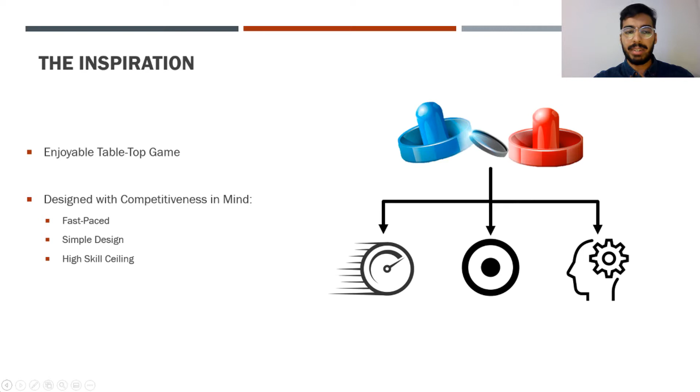Throughout university, we all enjoyed the tabletop game of air hockey as an opportunity to spend time with friends while maintaining healthy rivalries. The game is able to help maintain a competitive nature because it involves critical reaction times, simple mechanics and rules, and high skill ceilings due to the fundamental skills required to play.

As fans of air hockey, we saw an opportunity to improve the overall experience of the game through the implementation of higher quality features. Specifically, we had the desire to make the system autonomous and increase outreach through making the game more accessible, all while maintaining the traditional gameplay of standard air hockey.

The need for the desire could be highlighted by the growth of the game of air hockey within the market according to Technavio. The additional autonomous nature of the game provided a good opportunity for challenging solo play, such as in the presence of a pandemic. With added accessibility features, the game would also be able to extend outreach to a larger audience incapable of playing through traditional means.

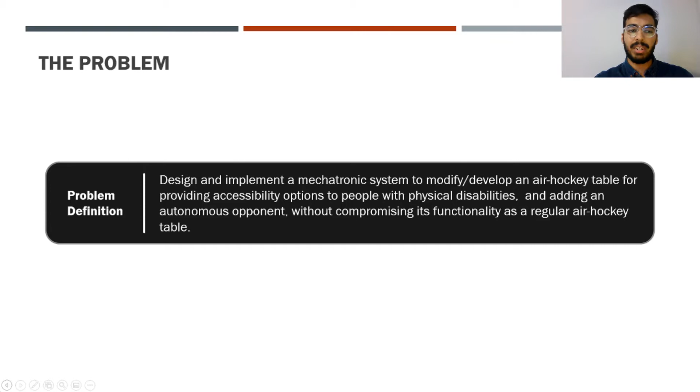Using the information compiled, the problem can then be defined as to design and implement a mechatronic system to modify or develop an air hockey table for providing accessibility options to people with physical disabilities, and adding an autonomous opponent without compromising its functionality as a regular air hockey table.

Using this definition, research found similar problems tackled by K. Igeta and A. Namiki, using high-speed cameras to predict required behavior of a robot-based opponent, while C. Marra et al. developed an autonomous table. The latter highlighted issues with the implementation of a camera-based system, which included a high-glare surface, high-resolution camera requirements for accuracy, and the time cost of cameras. The implementations prevented the tables from being used traditionally and did not implement accessibility features.

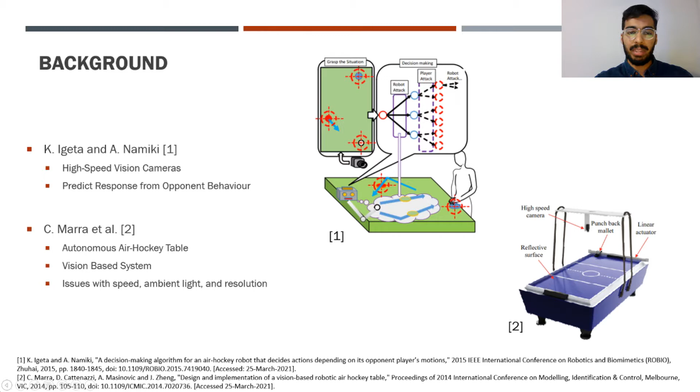Overall, it was determined that the project objectives required the solution to be user-friendly, such that the users could easily switch between autonomous, accessible, and manual play, while the overall design should be safe and robust. Functioning to block any shot according to the level of difficulty, the table presents a feasible technical challenge designed for commercialized entertainment. To best explain our final design, let's start off with a shot.

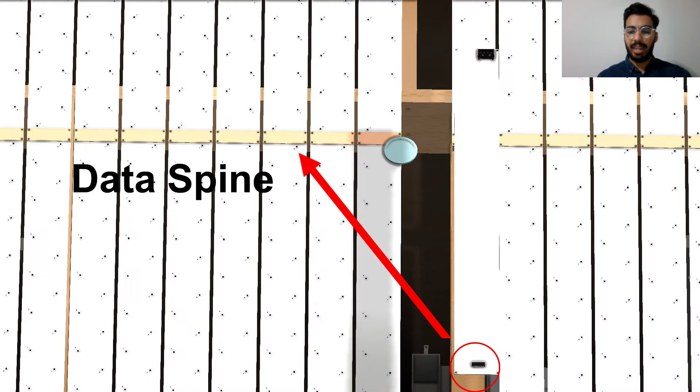As the puck leaves the point of impact, it takes on a very linear trajectory. As it passes over the table, it activates corresponding Hall effect sensors on a series of sensor-slat PCBs. These sensors are polled for their state every 1 millisecond, allowing us to read our puck position over 100 times on every shot. Each sensor half row is represented by a byte, and with 2 of these half rows in each PCB, a total of 2 bytes are sent by individual CAN bus chips through our data spine into our STM board, where all of the processing occurs.

The STM board is the heart of the system, with separate boards connected via CAN bus for managing accessibility and power. The STM board has been previously calibrated with knowledge of the position of each sensor. When the sensor triggers, the board knows the set of ranges of where a triggering puck could be at every polling interval of 1 millisecond. Using a Kalman filter combined with linear regression, this history of sensor activations is used to generate a velocity vector for the puck in real time.

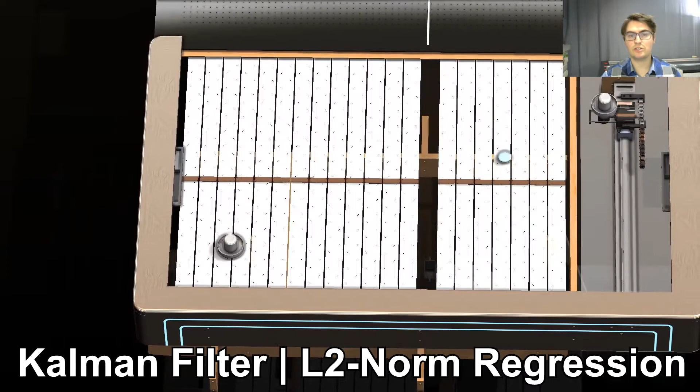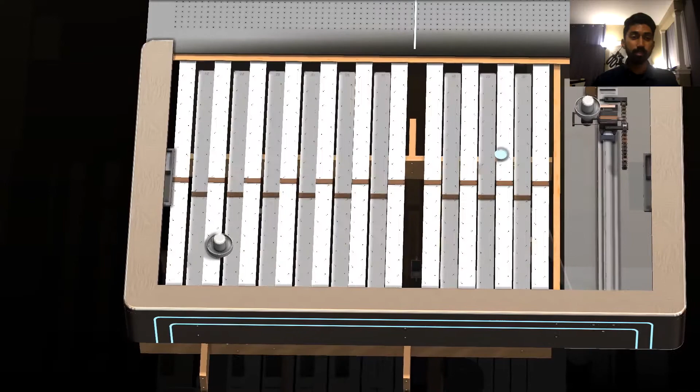With this, the system can predict where and when the puck will intercept our manipulator range of motion. It can even extrapolate shots that bounce off the wall. This is all a modular design, as the board is only concerned with activations for a series of calibrated coordinates, and the slats are all connected via one bus. The table can have individual sensor slats fail, be rearranged, or ship with different quantities depending on the desired trade-off between accuracy and cost.

In autonomous mode, the microcontroller would simply use the computed values to decide where to intercept the puck with the linear guide, and at what time the second degree of freedom should activate to send back a competitive hit. As we are in blended accessibility mode, we have a user that is using their accessibility input method of choice to set a desired velocity to the paddle.

This is accomplished through our accessibility interface, supplying 3.3 volts over a standard 3.5mm jack to read analog values from a variety of adaptive equipment. Supporting many input permutations to help balance user fatigue, our user's input position is scaled to a velocity value.

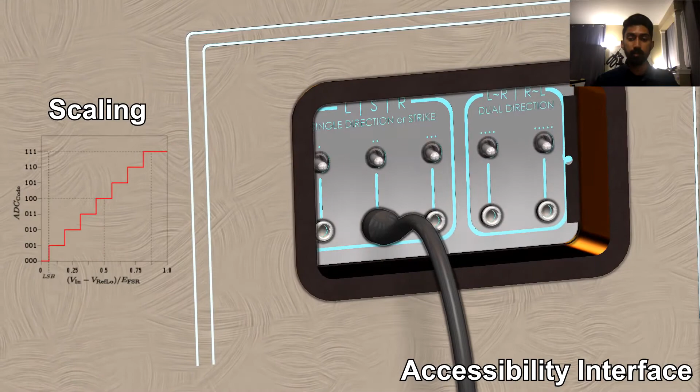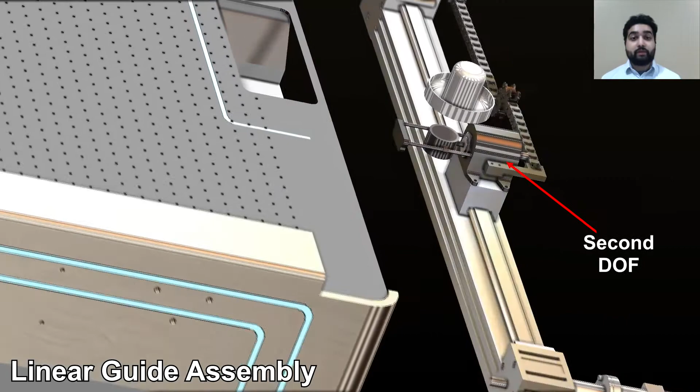These desired values are written to a Trinamic stepper motor, turning the belt on our linear guide, moving our carriage in the desired direction. Mounted on the carriage is our second degree of freedom, a capacitor-powered solenoid that moves a magnetic stack with a punching motion for offense. The paddle above, with magnetic inserts, follows the movement of this magnetic stack, and therefore the carriage. A plate mounted below the linear guide, itself below table surface, completely seals moving components, aiding user safety.

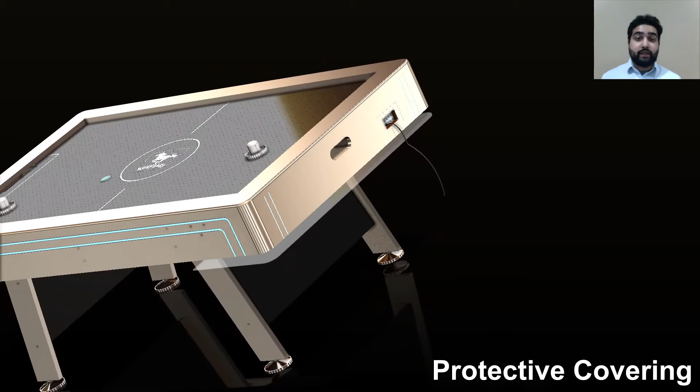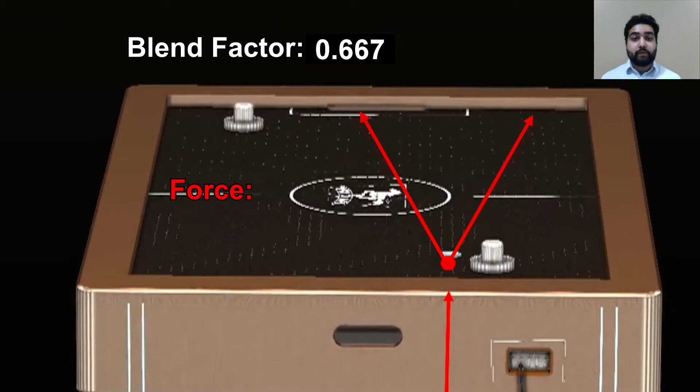Left unassisted, however, the use of a novel input method and the precise positioning requirements of the air hockey table would mean that most gameplay would result in misses. Our blended assist takes our computed intercept value and creates a conic well potential around it for possible manipulator velocity. This makes our final paddle position from player input to be very likely around the point of interception. In other words, our player is much more likely to make a successful response.

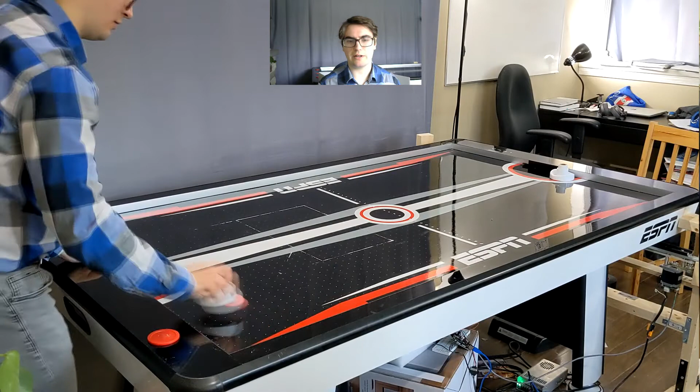Starting in autonomous mode, shots traveling over the outlined white rectangle on the table are tracked using the Kalman filter and linear regression algorithm and pinpointed with the linear guide to defensively return shots with a magnetically controlled paddle. If the user desires to play with a friend requiring accessibility control features, a simple mode switch command can be sent to change the table to accessibility control mode.

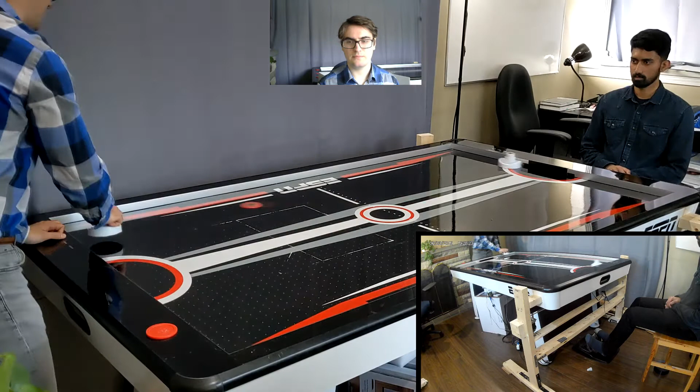Finally, with another simple Bluetooth command to switch modes, the table can quickly be adjusted to manual mode. With a quick swap of the puck and paddle, the table functions as a typical table. For the use of the mechanisms employed in the final design, the table does not require any overhead changes to maintain the aesthetic of a traditional table, with added functionality.

Overall experience with the table highlights its ability to provide multiple options for entertainment. As an added demonstration, we included a video of autonomous gameplay to show the haste with which the system responds.

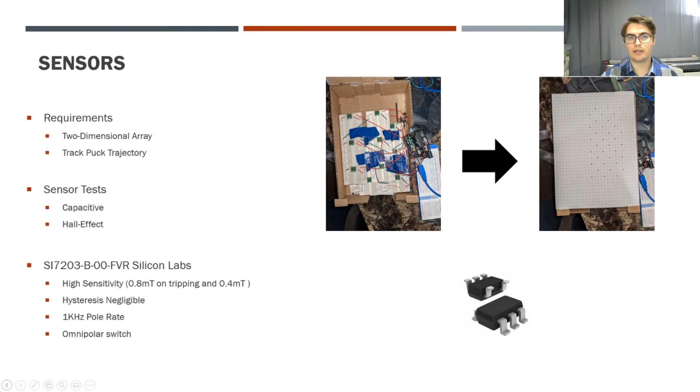With the discrete Hall effect sensors selected, the system started as a single board using an isometric grid pattern to maximize data along the X and Y axes. However, due to cost and mounting complications, a modular approach was opted for. First taking the form of 8 sensors per slat connected to a single CAN bus spine with the MCP25020s, the design was modified to double the amount of sensors per slat to form a linear spine by rotating the boards, each communicating 2 bytes of positional information.

To validate the modular sensor slat system, prototype boards were created using an offset isometric grid pattern with 16 sensors. However, the CAN GPIO extender selected was replaced with a 16-channel I2C extender due to the ease of use and lack of one-time programming.

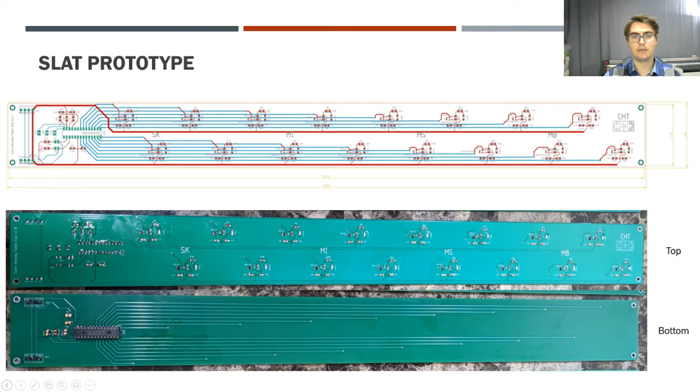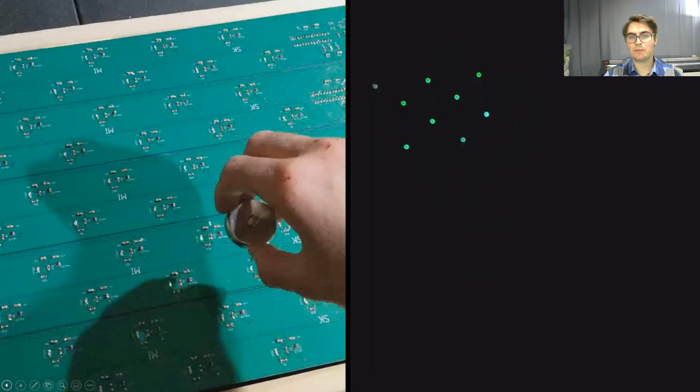Using a total of 80 sensors, 5 boards were mounted adjacently to create an isometric grid pattern with row and column spacing of 3 centimeters. Through incorporating LEDs into the design, post-fabrication analysis could be completed to verify sensor response to a magnetic field. With the lights off, the stability of the sensors through a lack of flickering indicated robust sensor design required for

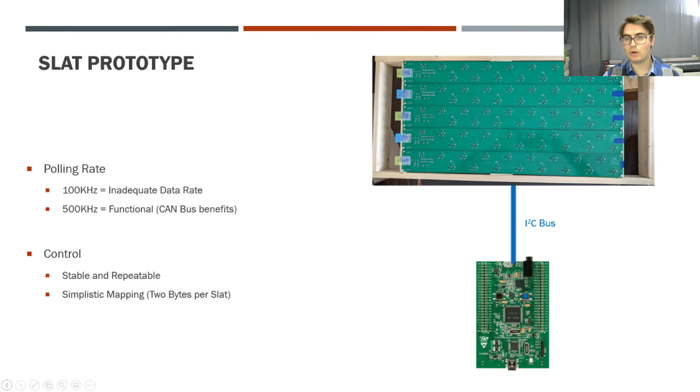the application. Through communication with the STM-based microcontroller used, the system struggled to adequately poll data at 1 kHz using a 100 kHz I2C baud rate. Incrementally increasing the baud rate to 500 kHz indicated no issues with communication nor noise, validating the requirement of a higher bit rate that a differentially signaled CAN bus could provide.

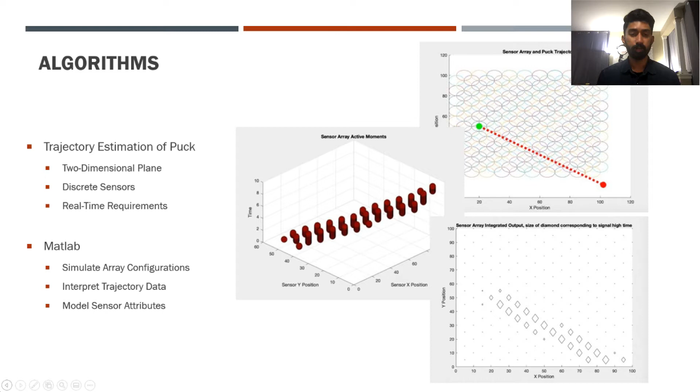Determining the trajectory of a magnetic puck as it travels over an array of sensors was aided through the use of MATLAB, where simulations were designed to model a point passing over an array of discrete sensors. The simulation permitted the modeling of sensor characteristics, such as poll rate and hysteresis.

Due to the linearity, time invariance, and symmetry of the system, the statistical method of linear regression was used to efficiently determine the trajectory of the puck along the path of triggered sensors in real time. However, the method lacked intuitive collision handling and required many sensors, driving up costs. As a successor, a custom-derived Kalman filter was developed from a dynamic model for intuitive real-time trajectory tracking.

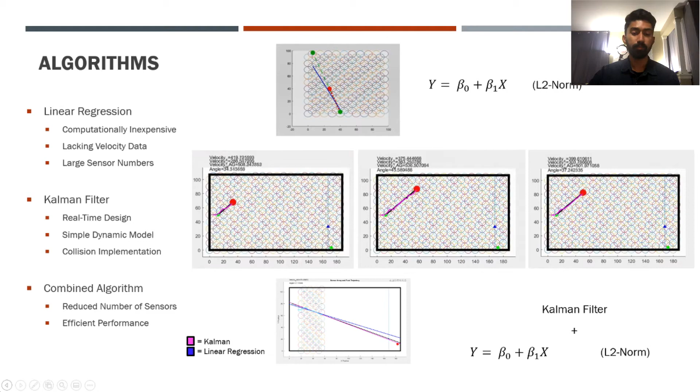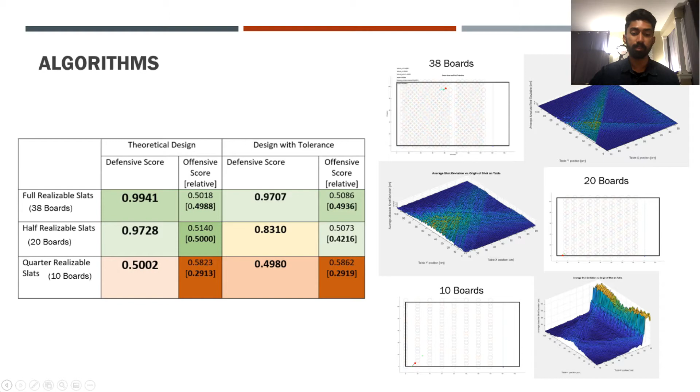To further validate the algorithm and sensor slat board design, 80 sensors were used in the previously discussed configuration. Due to the need to retrofit the board design, a compacted array was used to allow greater shot variety, while enabling validation of software-based simulations.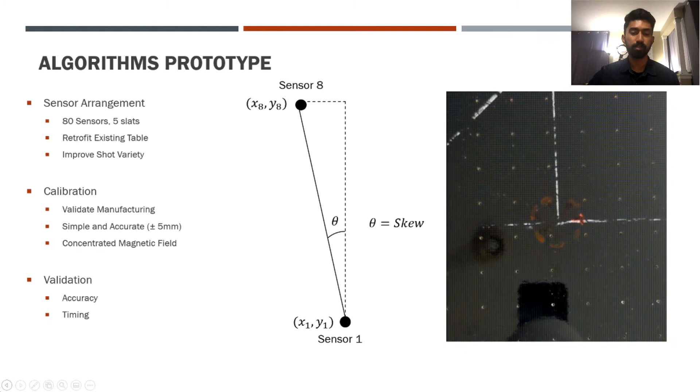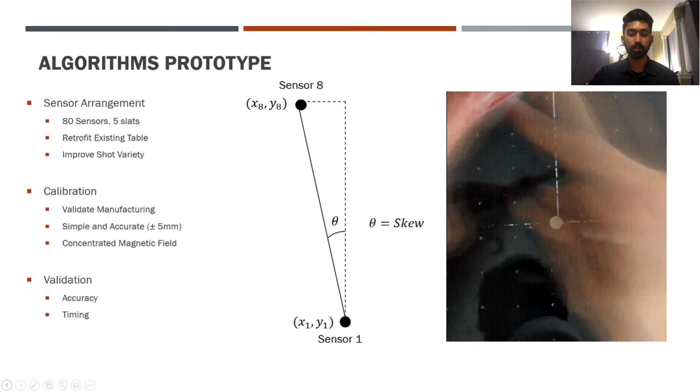Additional methods of calibration were used to validate array positioning beneath the table in addition to manufacturing tolerances. As shown on the right, a small magnet could be used to pinpoint the position of the sensors, while geometrical methods could be used to define a skew angle to locate the grid orientation.

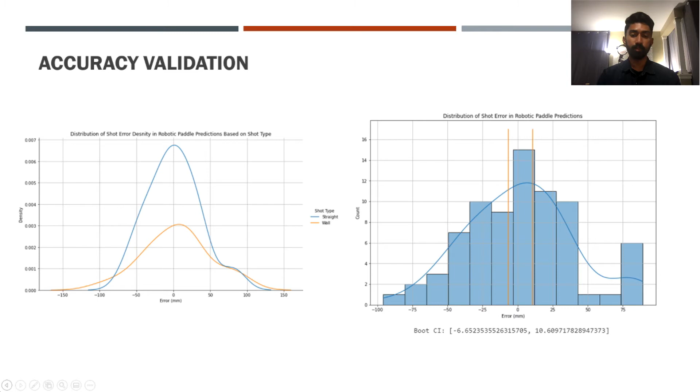Taking shots at a variety of angles, the trajectory of the puck relative to each position was determined using a high-speed 480 fps camera. Using the data obtained, the true and predicted intercept of the puck were compared to determine the relative positional error. Using a kernel density estimate of the straight and wall shots, the data follows a promising normal distribution, with a bootstrapped 95% confidence interval of approximately 10 mm error for the mean of the shots modeled with perfect accuracy. The results indicated formidable performance of the system, with shots only missing outside of the 75 mm interval.

The prototype sensor distribution was modeled in MATLAB using the same batch program as used for the final sensor script. Sampling the results of the model, at the 3 origin points of our test shots, 98.6% of the predicted intercepts resulted in real-life success as well, and qualitatively, error trends in the model against shot angle reflected what was seen in reality. All of this provides confidence that our model is representative of real performance.

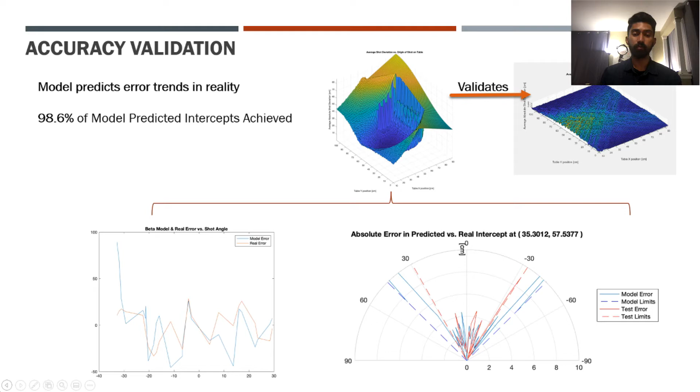For timing validation, the goal was to ensure that the strike mechanism would accurately strike the puck. Shots were taken using the same high-speed camera to calculate the collision error.

With a Bluetooth signal to simulate the delay in actuation of the striking mechanism, the number of frames between the collision and strike, as indicated by a collision message on the Bluetooth terminal as shown, were counted.

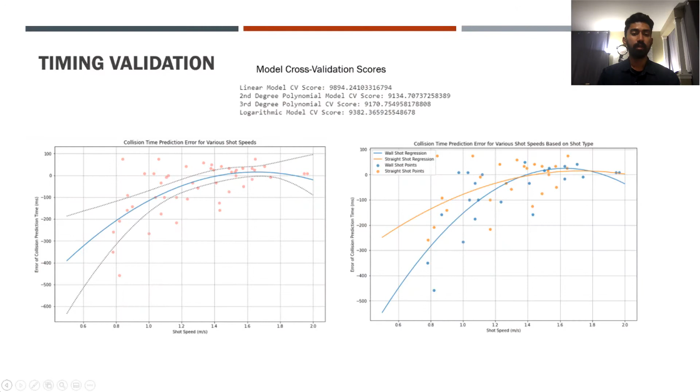The data indicated a converging trend of increased collision timing accuracy as shot speeds increased. Comparing the straight shots to wall shots also indicated that at higher speeds, more characteristic to air hockey, the wall and straight shot errors converged for consistent timing.

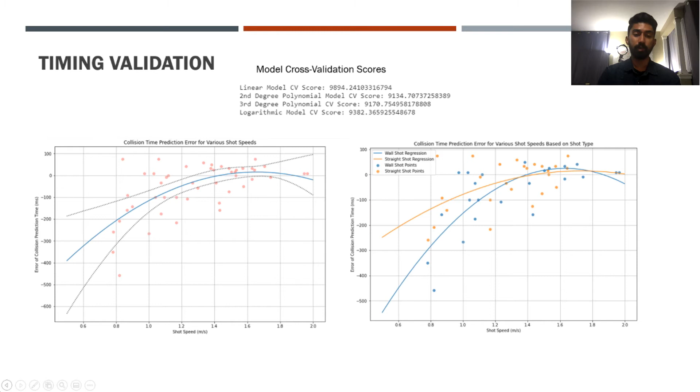The results above help understand that a strike mechanism having a full stroke time of approximately 200 milliseconds will be sufficient to ensure proper collision timing.

Soldered in through the I2C pins of the processor, jumpers were connected to form a bus to the sensor slat boards. Through a separate UART channel, an Arduino was used to validate the accessibility control board connected to the control device through a serial header.

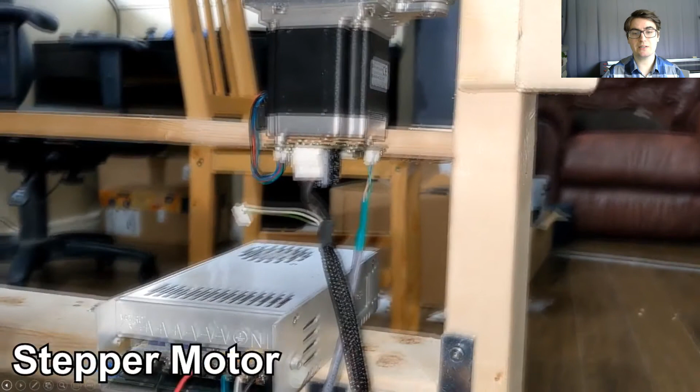Added to the board was a Bluetooth module to enable remote control and communication for mobile application validation. Finally, through a CAN transceiver, the trinamic stepper motors were connected to validate CAN bus configurations at a 1 meg baud rate.

Using a DC power supply, the power requirements of the system were validated at small scale through monitoring wattage of the constituent parts.

The configuration used validated accessibility control at a low 57.6K baud, while the overall system performance was stable and reliable.

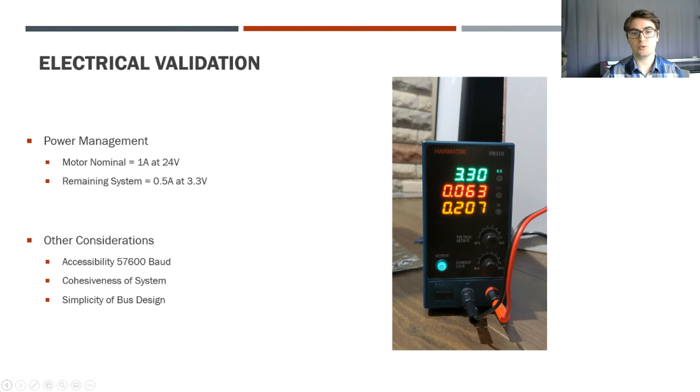To validate the final software design, focus was targeted towards developing the FreeRTOS task-based system, where priority was on development of tasks related to sensor monitoring, algorithm performance, and motor communication.

Using real-time trace monitoring of the main control board, it was discovered that the partially completed system boasted 98% idle time, with sensor slat bus communication dominating the load. The FPU of the processor also proved beneficial for precise algorithmic calculations.

We now cover some of the mechanical aspects of the project. For the 2 degree of freedom manipulator, a linear rail guide from HEPCO Motion was selected for the base degree of freedom.

Based on calculations that were cross-validated with the manufacturer's literature, the forces and moments exerted during use were well within the factor of safety for the carriage, bearings, and rail.

With the inclusion of the 2nd degree of freedom and enclosure, the linear rail guide was paired with a 4:1 gear ratio set to ensure the selected motor met the calculated torque specifications.

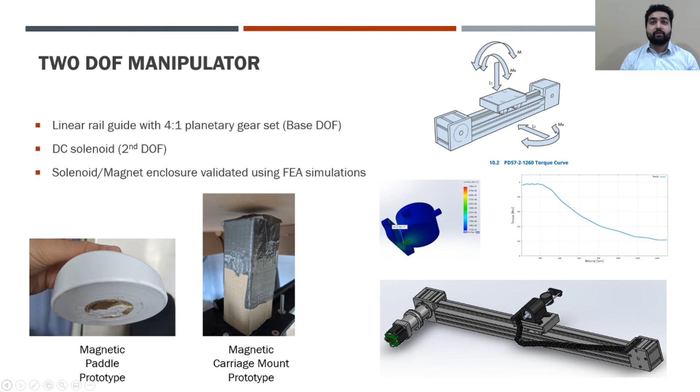A DC solenoid was selected for the 2nd degree of freedom given its compact housing and weight, and non-linear analyses were performed on the solenoid and magnet enclosure to ensure potential von Mises stresses would not cause part failure.

To provide optimal magnetic force interaction between the paddle and manipulator, part of the inner frame had to be removed. To ensure frame rigidity and minimal deflection, the width of the outer frame was extended by 3 and 1/4 inch, and the entire frame thickened by an additional 1/4 inch.

FEA simulations were performed on the table frame, where scenarios range from manipulator assembly weight at rest to the lateral force exerted at maximum acceleration.

Non-linear studies with symmetry boundary conditions were used with metrics such as deflection and first principal stresses, considering the brittle behavior of wood under extreme loads.

With a modulus of rupture of 80 megapascals for MDF and 48 megapascals for a 10-year use span, the FEA scenarios reported no first principal stress larger than 25 megapascals and minimal deflections.

Like the final design, the prototype table was modified to allow the manipulator to span the entire width. While lateral movement and vertical deflections were acceptable for testing, the upgrades made to the final design were visually justified and would be beneficial to the prototype.

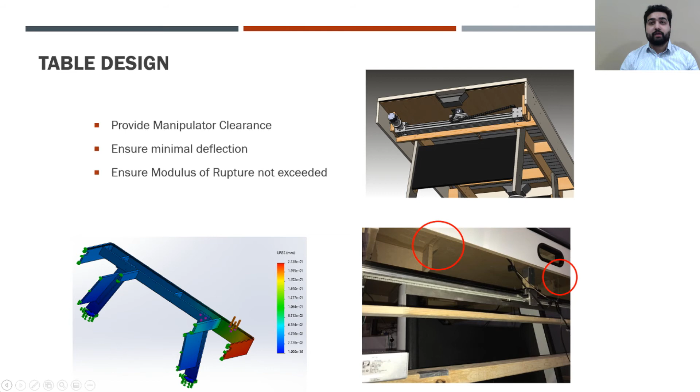With the incorporation of the magnet with the puck, design goals were based on minimizing the change in dynamics of the puck collision. Factors to minimize were change in mass, center of gravity, and dampening effects of the magnetic connection.

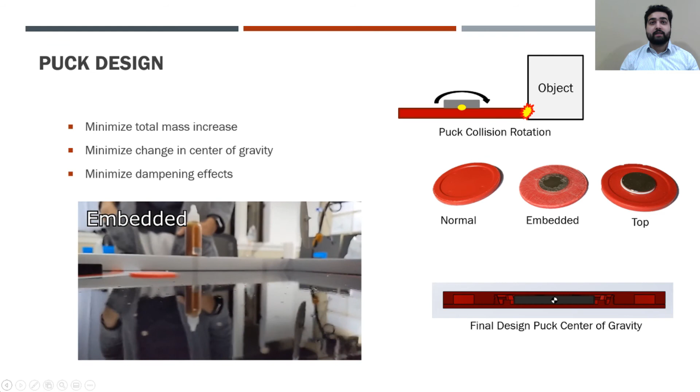With the magnet mounted to the top side of the puck, it resulted in a center of gravity shift that torqued the puck when it collided with objects, as seen in the video. The use of soft-cured adhesives also resulted in damped collisions and reduced speeds.

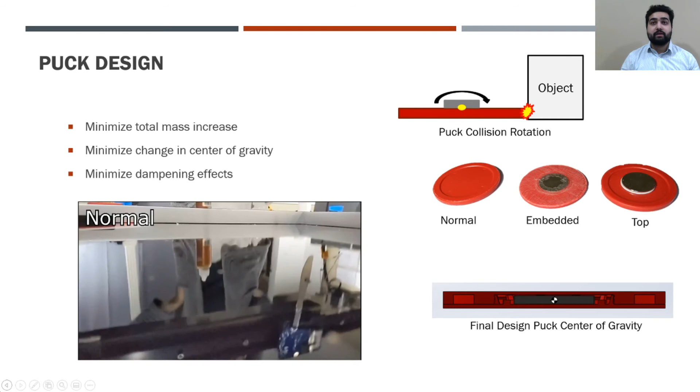By inserting the magnet inside the puck and using more rigid adhesives, the embedded magnetic puck had similar collision dynamics as the original puck. These factors validated the design choice to have an internally embedded magnet in the final design, with hollowed sections to minimize mass increase, and a snapped design to minimize manufacturing time.

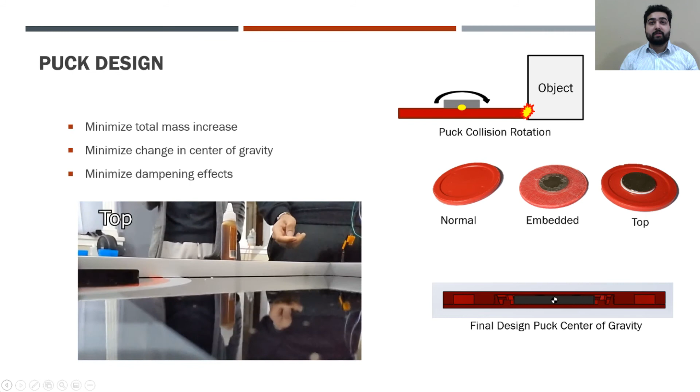The magnetic interaction between the paddle and puck was also a key component to be validated. The interaction between the puck and paddle was tested through taking consistent shots along the table side and measuring the difference between pre-collision speed and post-collision speed with a 480 fps camera and a standard square-inch grid pattern on the table, allowing approximate velocity estimates to be obtained.

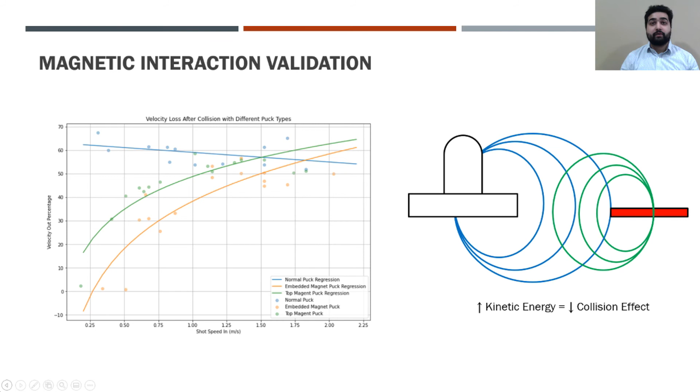The data was analyzed for the relationship between pre-collision speed and post-collision speed as a percentage of pre-collision. Although the post-collision speed of the normal puck was agnostic to initial puck speeds, when the speed of the shots increased to 1.5 meters per second, the magnetic puck's post-collision speeds began to converge with that of the normal puck. As a result, at higher speeds, the higher kinetic energy of the puck dwarfed the loss of energy resulting from magnetic interactions over an inelastic collision, rendering the magnetic puck effective at typical air hockey speeds.

For accessibility control, as discussed previously, the accessibility interface was replicated through the use of an Arduino to process analog inputs for controlling the paddle. Provided that control devices operated within similar voltage ranges, they could easily be swapped to provide endless accessibility control options, including the foot pedals used for the prototype.

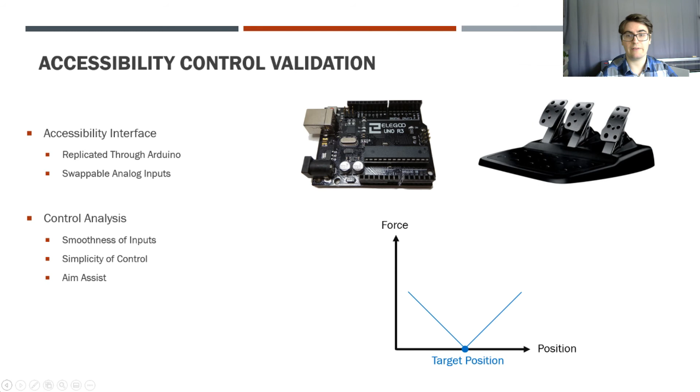To improve the overall system control at high speeds and reduce the learning curve, aim assist was implemented using a design similar to a conic well potential, applying forces to help guide the player to the target position with the sensor algorithm. To validate the design, we first see that as a shot approaches and the user depresses the left foot pedal, with the aim assist mechanism activated...

Once the target position is reached, the well force prevents the user from moving away until the shot has completed.

On the next shot, it is demonstrated that without touching the controls, the paddle does not move. In the final shot, when the user attempts to move away from the target position, a large force is experienced which counteracts the desired movement until the shot is complete.

To conclude, there are still a few areas we would like to have seen the prototype be a more accurate representation of our final product, including the use of the final number of sensor boards, mounting the manipulator within the main assembly, and testing other accessibility control options such as face tracking. Additionally, the implementation of a 2nd degree of freedom punch mechanism would have verified our offensive performance.

However, this aspect of the project was not prototyped due to the retrofitting table damage that it implied, as well as mass limits of the linear guides we used. In addition to the challenges mentioned, manufacturing constraints prevented the development of a lightweight adapter for our linear guide carriage to securely hold our magnetic actuation assembly.

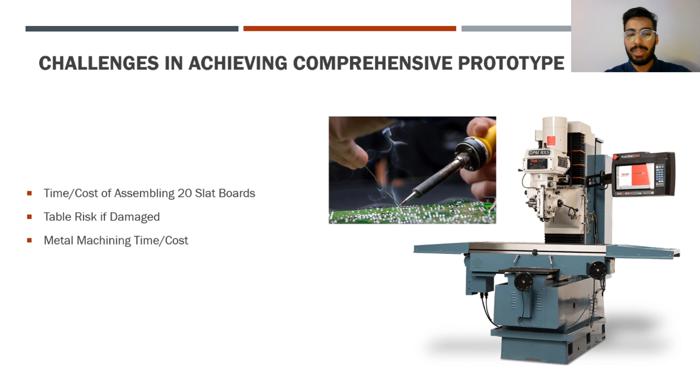With the uncertainties in shipping time and availability of a replacement table, it was decided to best manage the risk through building a prototype that validated our concepts without potentially causing irreplaceable damage to the table.

To the completion of this project, we developed our skills in self-organization, as under our COVID-influenced circumstances, we learned how to do this using planning tools and conferencing services such as Microsoft Teams.

With the restrictions in our physical prototyping ability, we poured more time into ensuring that we modeled our systems as thoroughly as possible in tools such as MATLAB to ensure our first prototype iteration would have no surprises.